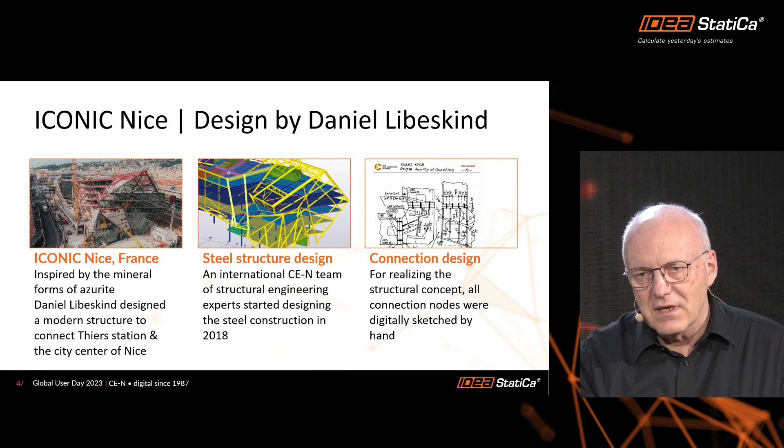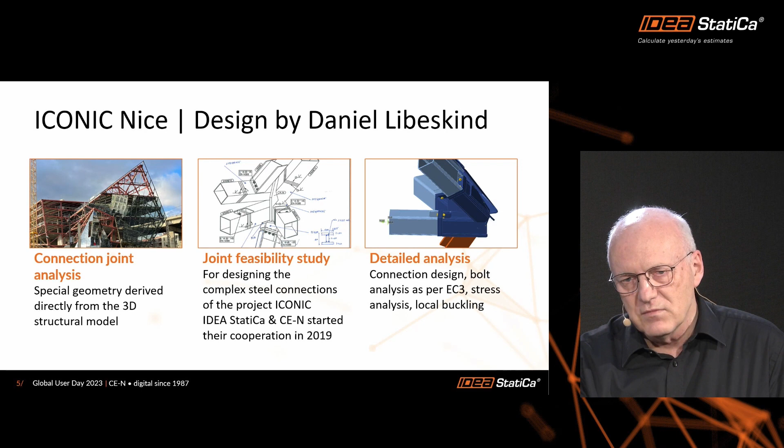After that, we built this in Tekla, so the structural engineer can understand how these complex connections can go. There are tube connections and I-beam connections, so it's a challenging joint. We had around 600 of these complex joints in this project. On the right side, we can see how it has been analyzed in IDEA StatiCa. This model was directly derived from Tekla Structures, and it was running perfectly. We could not do it another way, because to justify that such a complex model is working, you need a tool like IDEA StatiCa.

So what is our experience with IDEA? Especially for this type of special project, we got quick feedback from the team, because of course the special node was not really implemented at first. We needed to learn something, and then we could implement this complex geometry quite quickly. Of course, there is also troubleshooting, but the answers come very quickly, and this is why we are using this. We are not using templates a lot for this special project, but for similar projects we can also use the templates.

For the improvement process, we need more and more adaptation for complex geometry because we are specialized in analysis of complex geometry projects. We also need bug fixing, because if we drive the system to the limits, we need the bugs fixed. We are looking forward to increasing the usage of IDEA for connections with thin plates less than 3 millimeters thick, and also for steel-concrete composite connections with compression, bending moment, and tension. This is what we are looking for, because complex geometry is our daily work. So I'm closing this short presentation, thank you. I hand over to...

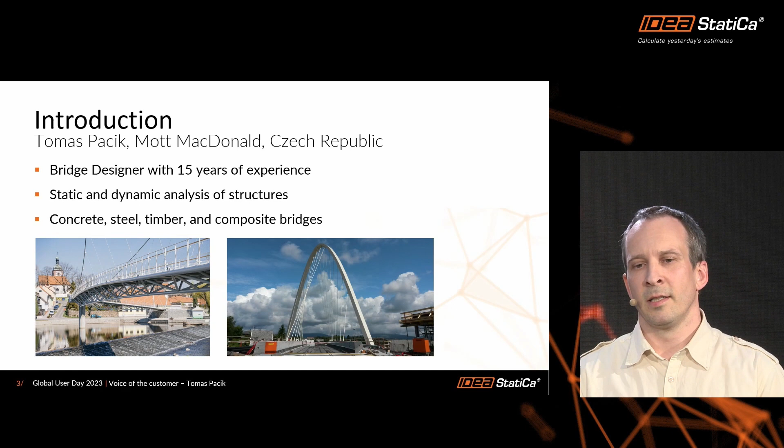Our profession is sometimes very stressful, a lot of communication, coordination and responsibility, and little time for the most important matter, and this is the safe and economical design. IDEA StatiCa helps us to design and verify the structures in a short time without the need to study manuals, due to its friendly interface and ease of use. We are trying to use all products of IDEA StatiCa in order to leave more time for engineering work.

On the picture below you can see the Matagarup bridge. This is the footbridge in Perth in Australia. We did the category 3 check there, and for the verification we used the IDEA StatiCa software. We appreciated the Beam module, where we are able to design and verify the composite structure in a very short time. It was very difficult for us to account for time-dependent analysis and effects of prestress correctly in a common spreadsheet or software, but IDEA StatiCa can save our time, and it's very beneficial for us.

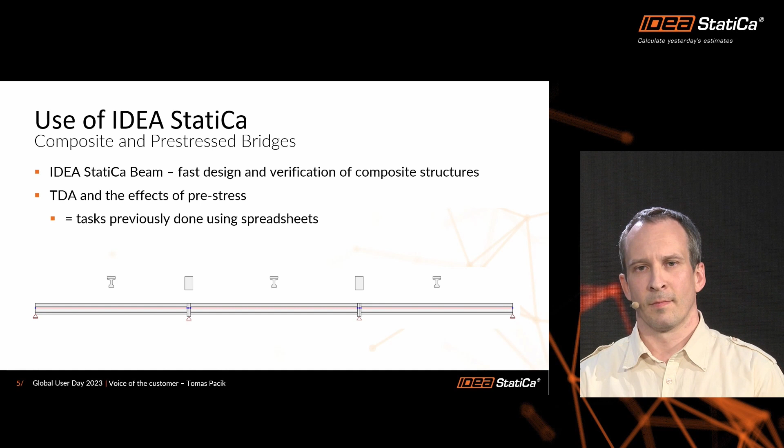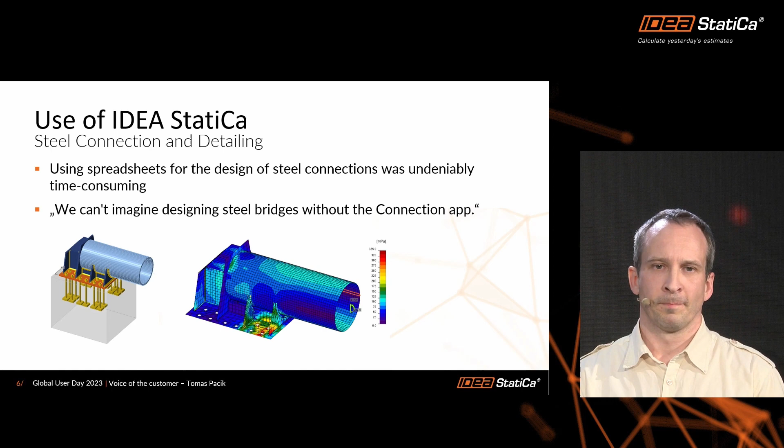Steel connection. I remember the time when we used spreadsheets for the design of steel connections. It took us a lot of time. It was strange and stressful. And now we can't imagine designing steel bridges in real time without this module.

Our wishes for improvement are thermal and moving loading in the IDEA StatiCa Beam module, because now these effects are added to the program by hand, so it takes time. The common structure is a steel girder and concrete deck composite, so it's very useful for us. Assessment of early thermal cracking in the IDEA StatiCa Detail module, and some help hints or hyperlinks for better understanding of task inputs and principles of the calculation, to better understand how the software works.

We are trying to explain to our junior engineers that software can't replace engineering craft and experience, that open eyes and engineering judgment are sometimes still our best tool. Ultimately, we are happy to have this strong software to validate or refute our assumptions. This allows us to be faster in designing better structures.

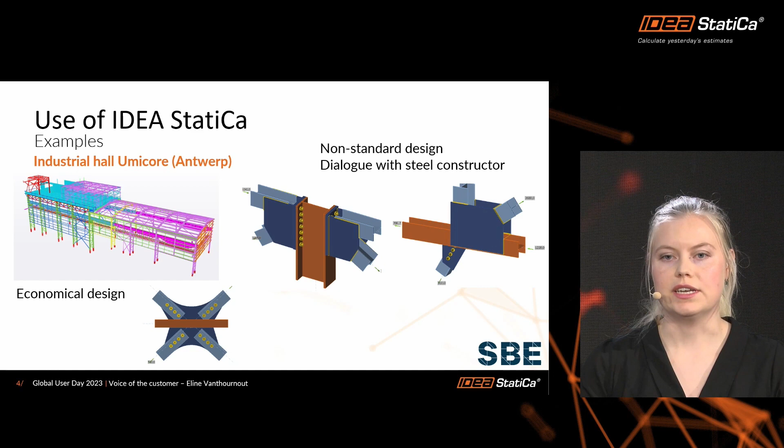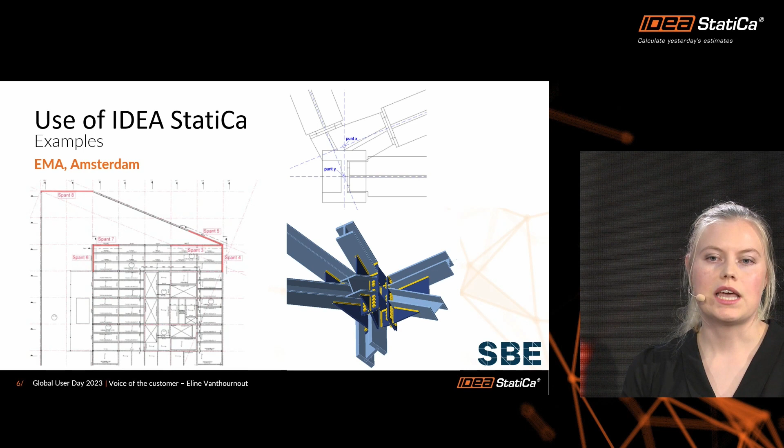For most connections of the floor beams, the calculations were done by hand, but for the more complex geometries where we had a lot of eccentricities and non-perpendicular connections, IDEA StatiCa was more appropriate. For example, this node where 3 trusses had to be connected to 1 column. We also had several nodes which had a difficult geometry and where the hand calculations were not sufficient. So we recalculated them using IDEA StatiCa and we obtained more efficient results. Also, the stiffness of the connection has a large influence on the forces in the bolts and the stress distribution in the welds, so we could obtain more accurate results.

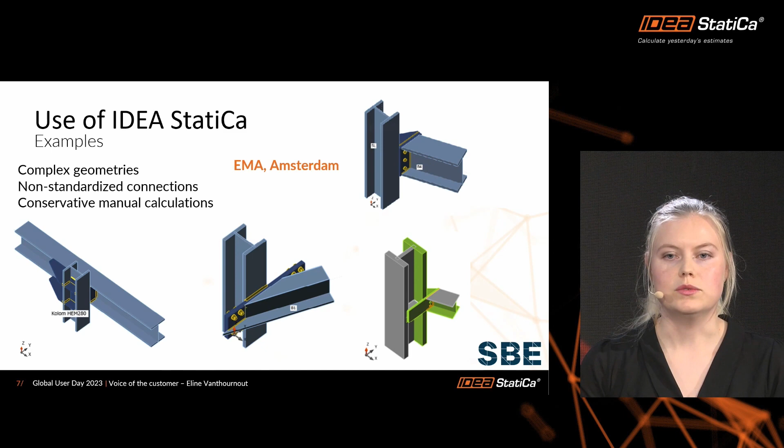Another project that I would like to discuss is the Oosterweel connection. Around the city of Antwerp, one of the largest infrastructure projects in Belgium is planned, and part of this project consists of building a new tunnel underneath the river Scheldt, and a deep construction pit had to be constructed for the access ramps to this tunnel. So in order to guarantee the stability of these deep retaining walls, steel frames were added at different levels, which are steel girders placed against the retaining walls and steel tubular piles in between.

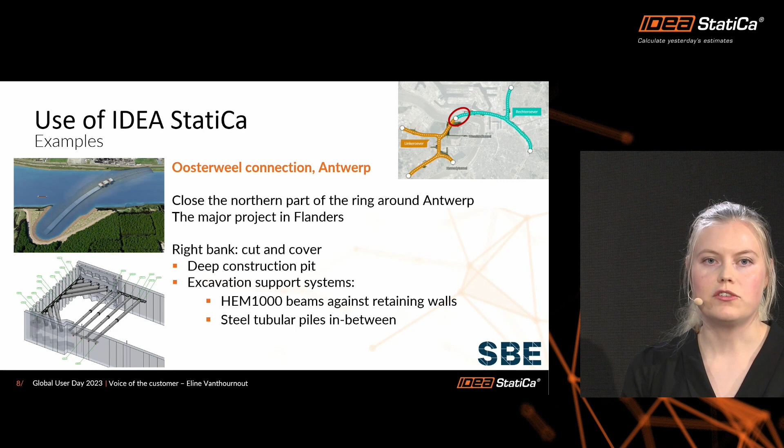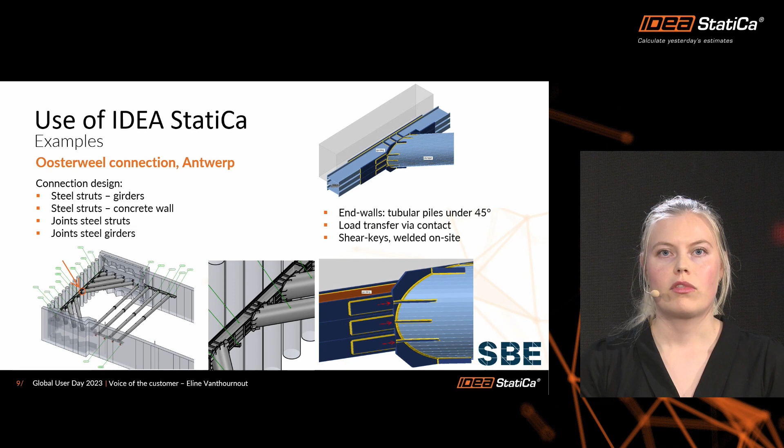And the normal forces in these tubular piles go up to 1,000 kilonewton. At the end walls, these tubular piles arrive at an angle of 45 degrees. So part of the normal force had to be transferred as a normal force in these girders by pure contact, so we added a lot of stiffeners. The other part is transferred as a shear force. Therefore, large steel plates are welded onto the flanges and can serve as a shear key. For the straight tubular piles, shim plates were added, which are the orange plates in the figure.

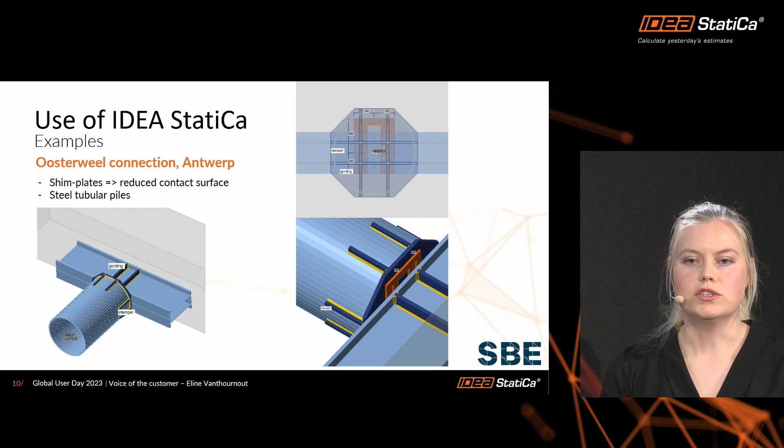This was both for tolerance reasons as well as to facilitate the removal of the tubular piles, but this implicated a very much reduced contact surface and it complicated the manual calculations, so IDEA StatiCa was used. So we think it's a quite powerful program.

We still have some issues in the workflow. For example, when you open old files in newer versions, or when files are opened simultaneously, they can be overwritten. So that's a bit of a problem. We are also looking to further optimize our connection design, and the new feature of the Checkbot is helping us, but we are still struggling with the limits of the data size and also its limited flexibility.

Of course, we also have some wishes of functionalities that we'd like to see improved. The automatic extraction of forces is already present, but we'd like to have a bit more control so that when we have a lot of members in one node, the calculation time isn't too high. We would also like to see the implementation of surface and line loads.

And for the workflow, mostly we model the connections ourselves, but if we have very special geometries, we also use the BIM link. So we think it's great that you're considering new ways of making the construction design more efficient.